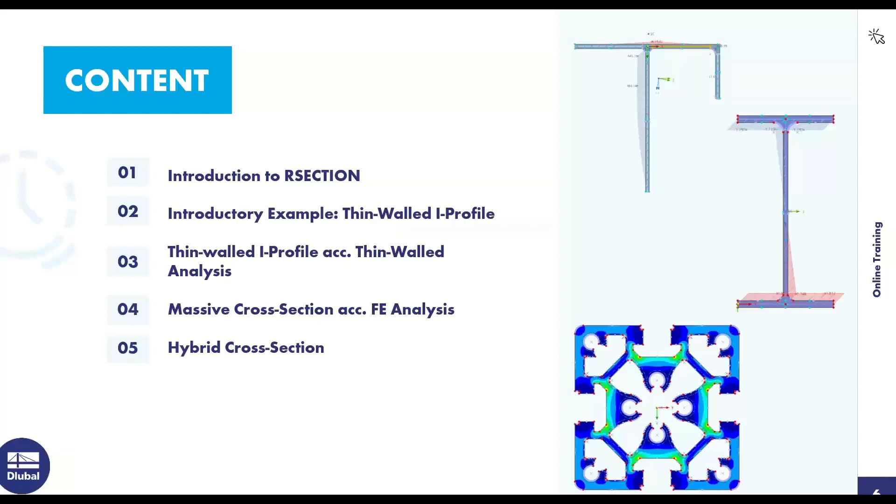Okay, then I will show you the RSECTION interface. RSECTION is an independently executable program for generating any thin-walled or massive cross-sections. If you want to design special cross-sections in RFEM or RSTAB that are not contained in the cross-section library, you can create them with RSECTION. You can then import these user-defined cross-sections into RFEM or RSTAB. In RSECTION, it's possible to calculate cross-section values and stresses.

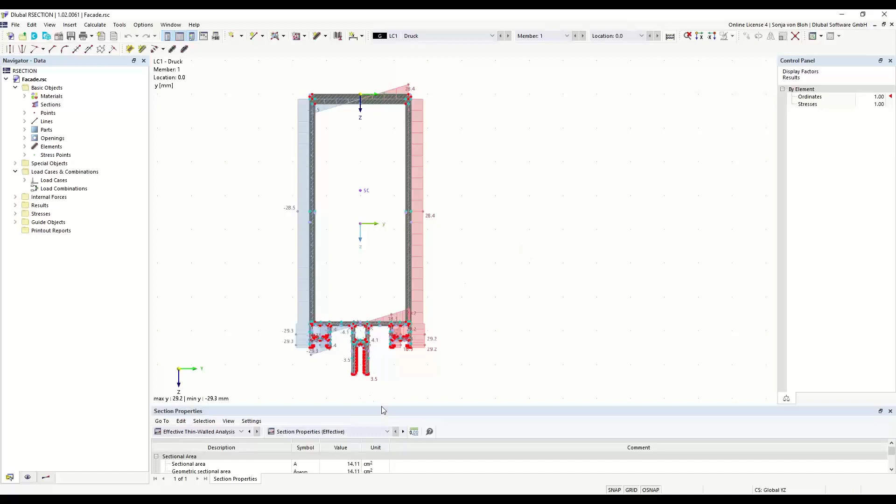The RSECTION user interface is the same as in RFEM 6 or RSTAB 9. The cross-section graphics and dialogues are displayed in the working window here. Most tasks can be performed with the mouse. In the table at the bottom, the keyboard is primarily used for numeric input, and you will also find the output of the calculated results.

Here on the left, you see 3 navigators: the navigator data, the navigator display, and the navigator for results. The data navigator manages the input data. If I double click here, opening this tree on an object, maybe here the points, it opens the corresponding dialog in which the selected object can be changed. However, it's also possible to create new objects. If you right click on an object, you will find here the corresponding functions.

Then I will go to the navigator display. The display navigator controls the graphical display in the working window. If the checkbox in front of an entry is unchecked, this object is hidden in the graphic. If I uncheck the points here, then you will see in the graphic that the points are not displayed anymore.

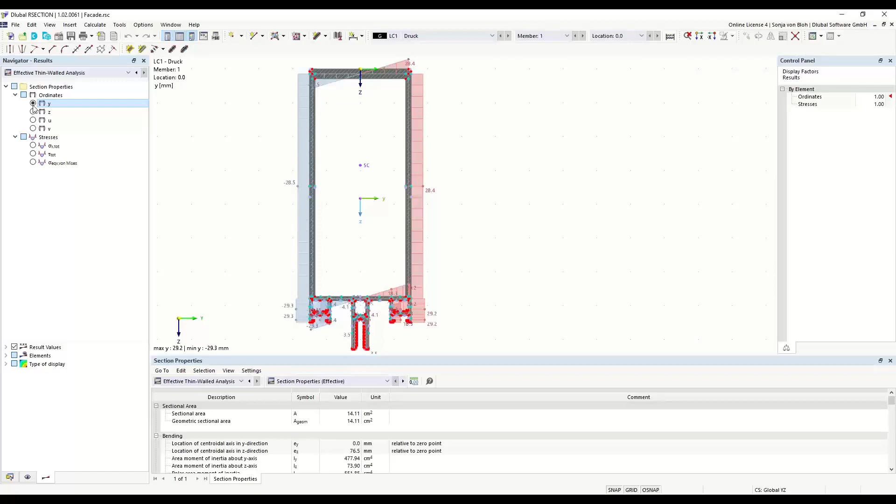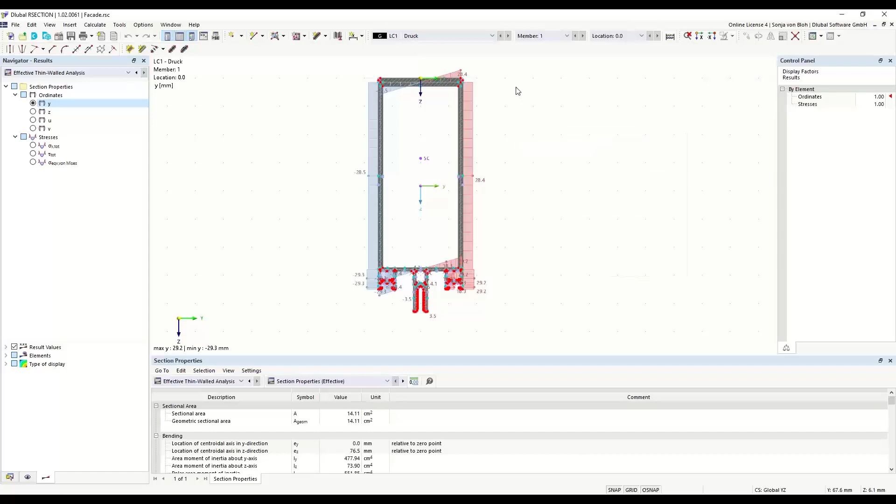Then I would like to go into the mouse functions. To move the section, you can hold down the mouse wheel and move the section accordingly. You can turn the mouse wheel to zoom in or zoom out. Then you can right click to open the context menu. You can also select objects with the mouse. If you open a window from left to right, everything that is completely within the selection area will be selected. Here, these objects were completely in the selection area, so they are now selected, which you can see with this yellow color.

If you drag a window from right to left, everything intersected by the selection area will be selected. You can see here now that also this part is selected because it was intersected by this window.

You can also select individual objects. Left click on the objects to be selected. Here I want to select this point, so I left click on it. If I want to add another object to the selection, I hold down the Control key, and then you can see the mouse pointer shows a plus, and I can select the other object.

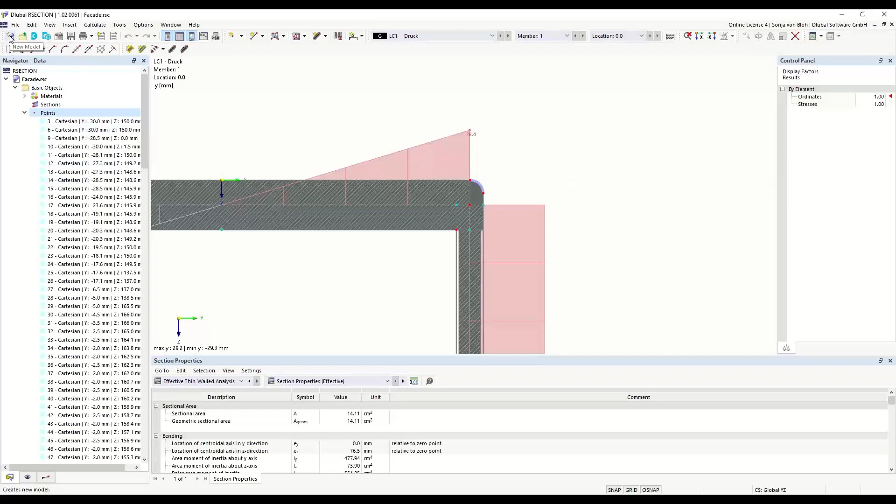To create a custom cross-section, I have to create a new file, and I will do this via this button, New Model. Then I first have to enter the cross-section name, and I name it Example 1.

Furthermore, the analysis method must be defined. I have two possibilities here: finite element analysis and thin-walled analysis. I choose the thin-walled analysis in this case. The effective cross-section can be calculated for both analysis methods.

After activating the option effective section, a standard must be selected. Several standards are implemented here: Eurocode 3 Part 1.1, Eurocode 3 Part 1.3 for cold formed sections, and Eurocode 9 for aluminum sections. I choose here this standard, Eurocode 3 Part 1.1.

According to this standard and the rules described in it, the subpanels are generated and the effective cross-section is calculated. The selection of the analysis method or the standard is irrelevant when using the RSECTION cross-section in RFEM or RSTAB.

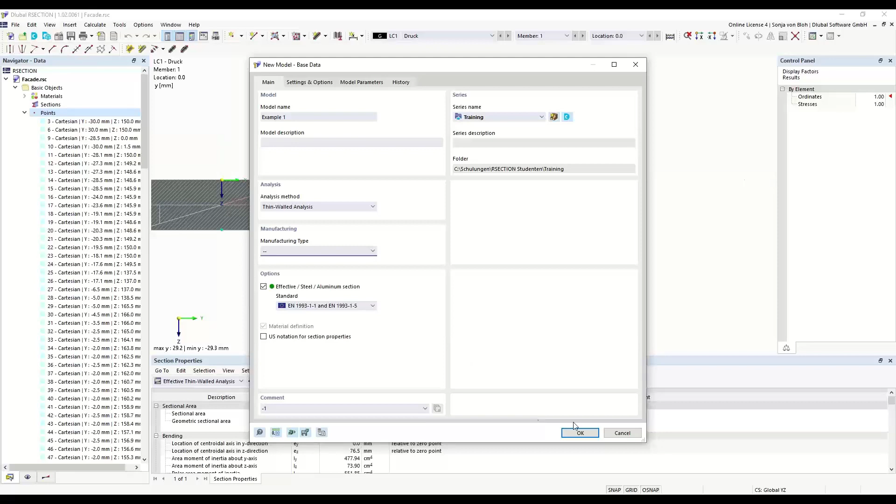I don't define a manufacturing type here in this case. Then I click OK, and a new file will be created.

First I define the material. Here already two materials are defined. If I double click on it, I will open the edit material dialog. If no materials are defined, it's also possible to right click on this material and create a new material.

I open this dialog again, and I can create on the list via the button Create New Material, a new material, or it's also possible to copy selected materials.

I can enter here, if I click on this button, a user defined name directly, and RSECTION, if I type in this name, lists all materials that match that name.

But it's also possible to open the material library via this button, and I will do this in this case. Here in the material library, filters are available on the left to quickly find the material. Here, maybe I can choose steel, then all steel materials are listed on the right.

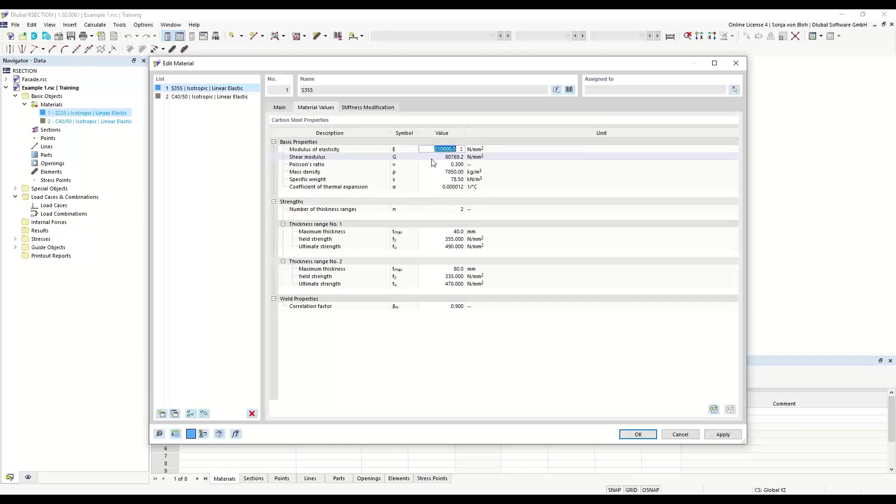If the material is not in the material library, I can create this material by activating the checkbox user-defined material, and then it's possible in the following tabs to define the properties I want to use. I don't do this today, so I deactivate this option again, and then I click OK.

I then create the elements. The definition of elements is required if the analysis method, analysis of thin-walled structures, is selected, or if the effective cross-section is to be calculated. An element must always lie in an area, and this area is called an RSECTION part.

Elements can be created graphically or via a dialog. The graphical input is called up via the symbols you can find here. The input via a dialog is called up via this navigator data. Here you can create a new element.

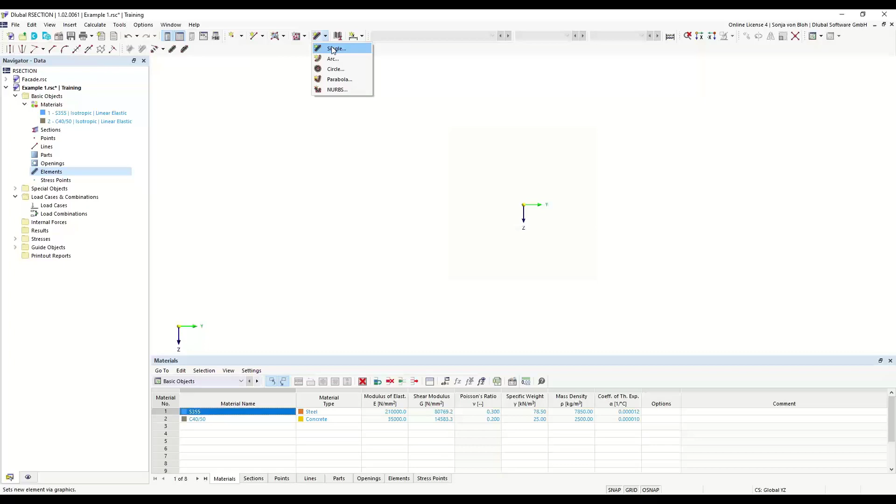When creating an element via the graphical input, the part is also created. When creating an element via the dialog box, the parts and the points of the element must be created beforehand. That's why I can't choose this dialog now, because I haven't created the points before. So I choose this function for the creation of elements. Here I choose single.

I enter the bottom flange here first, and for this I use the input mode length and direction. Here I define an angle of 0 degrees, a length of 150 millimeters, and a thickness of 10.7 millimeters. Then I can insert this element in the working area graphically, or it's also possible to define the point coordinates here. I put this on the coordinates 0, 0, and for this I left click here in the working area.

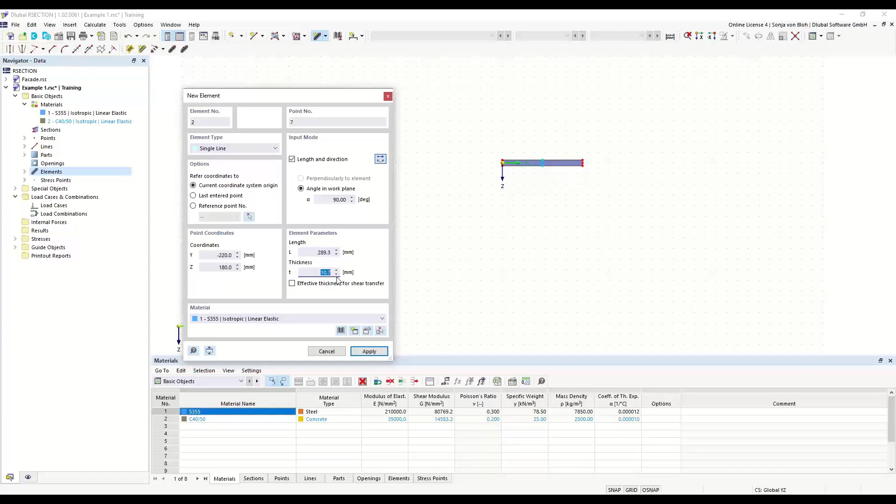Then I create the web, and for this I use the input mode length and direction again. Here I define an angle of 90 degrees, and you can see here what's happening. Now I reverse the orientation, and I define a length of 289.3 millimeters and a thickness of 7.1 millimeters. Then I left click here on this node.

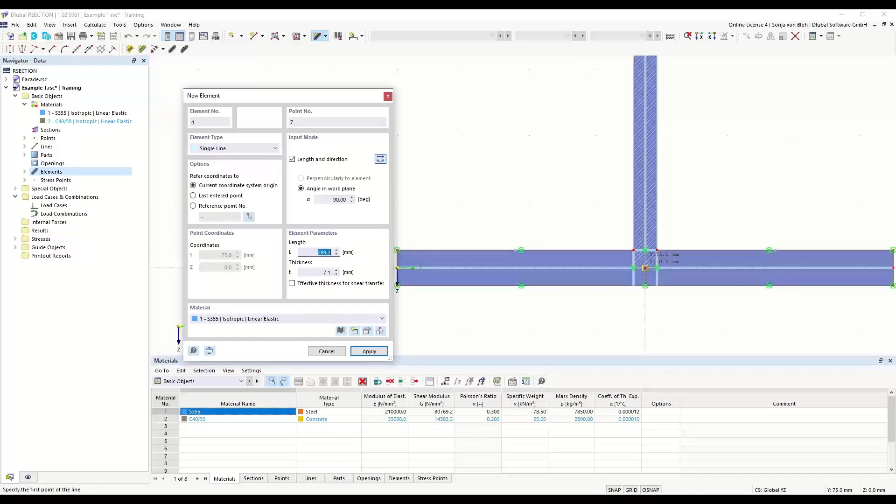Elements must be connected for the calculation of the effective cross-section. The connection is to be made via the start and end points of the elements. If two elements share the same points, they are connected. I have this element here, and they share this point, so they are connected.

Then I create the left flange. For this, I use the length and direction input mode again. Here I define an angle of 0 degrees and a length of 75 millimeters, and a thickness of 10.7 millimeters. Then I left click here on this point. Then I reverse the orientation again, and I left click on this point again.

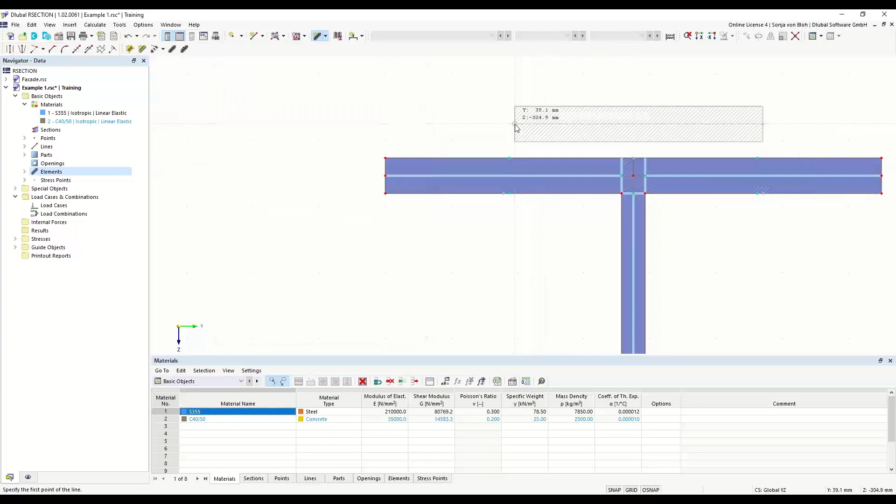The cross-section should be a rolled T cross-section to which a lower flange is welded. The round radius is 15 millimeters.

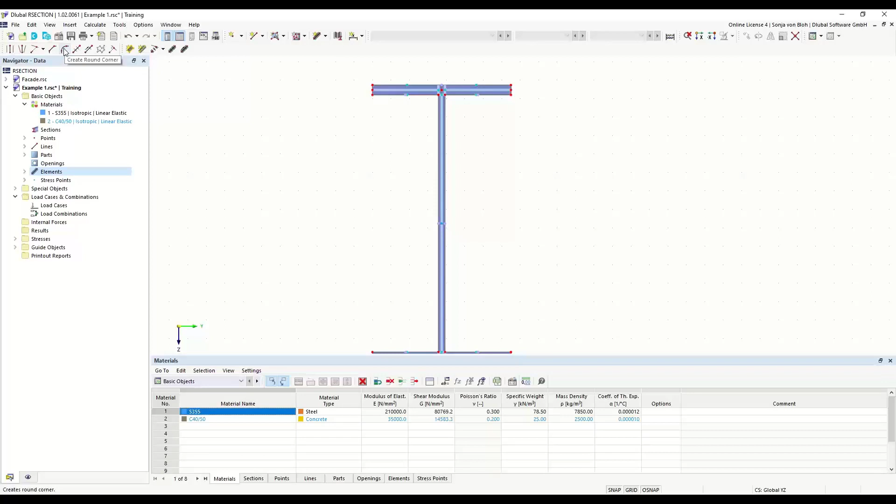I can define lines to create them, or use a function called create round corners. I find this function here, create round corners, click on it, and define a round radius of 15 millimeters. Then I have to left click on the corresponding lines. If I right click on the mouse, I leave the dialog, or close the dialog.

Then I have to define the welds. For this, I use the function create angled corner. Here you have two corner types, both edges and edge and angle. I choose here the edge and angle corner type.

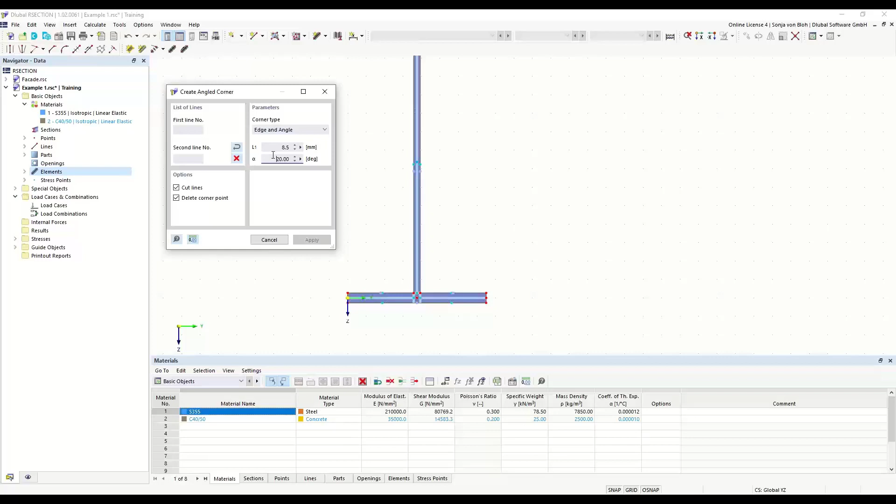The lower flange is welded with a 6 millimeter double fillet weld. I can type in the length here, or it's also possible to calculate it in this dialog. So I define 6 multiplied by the square root of 2. Then I have to define the angle, and the angle is 45 degrees. Then I have to click on the corresponding lines. And now my welds are created.

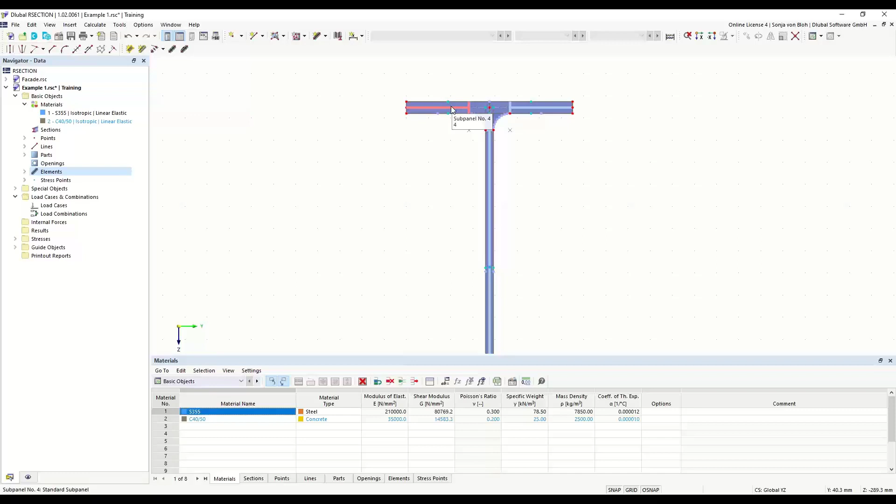What you can see here are the sub-panels, and these sub-panels are automatically generated based on the standard selected in the base data dialog, and these cannot be changed. If no elements are defined, the cross-section classification in RSECTION and the design in the design modules of RFEM or RSTAB is not possible.

It's also not possible to do a calculation of the effective cross-section if no elements and no subpanels are defined. In the design add-ons of RFEM or RSTAB, like steel design, the cross-section is then designed according to cross-section class 3.

I would also like to use this example to show you how to calculate stresses and the effective cross-section. In order to calculate stresses or the effective cross-section, a load case must first be created. Load combinations can also be created, and I create a load case now.

I do this via the navigator data. For this, I right-click on the load case, and then I choose a new load case. Then I can define a load case name if I want to, and I name it N. Then I create a second load case via this button here, create new load case, and I give the load case the name M.

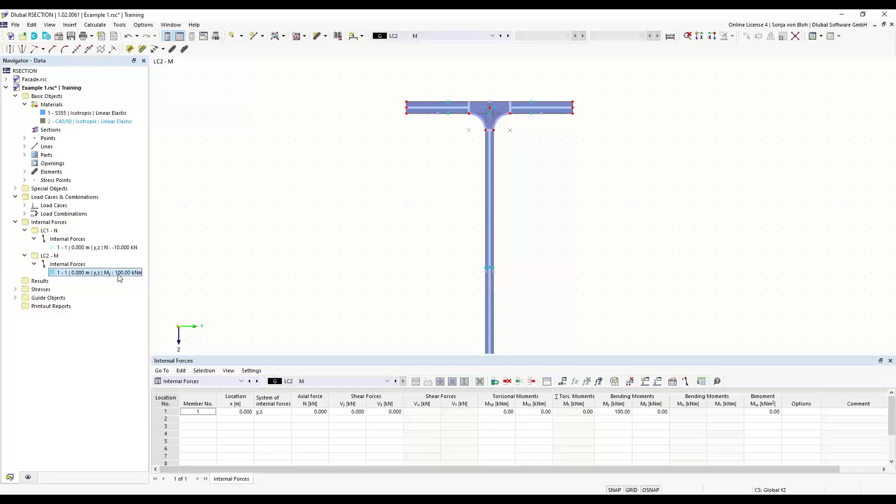Here I click on Apply and Next, and choose load case number 2. Here I want to define not an axial force, so I set it to 0, and I want to define a bending moment about the y-axis, here 100 kilonewton meter. Then I click OK. In the navigator data, you can now see in load case 1 an axial force of minus 10 kilonewton is defined, and in load case number 2, a bending moment of 100 kilonewton meter is defined.

The blue dots that you can see here on the graphic are the stress points. Stresses are calculated and displayed at the stress points, and the stress points are generated automatically. Stress points can also be defined manually, and I want to do that here.

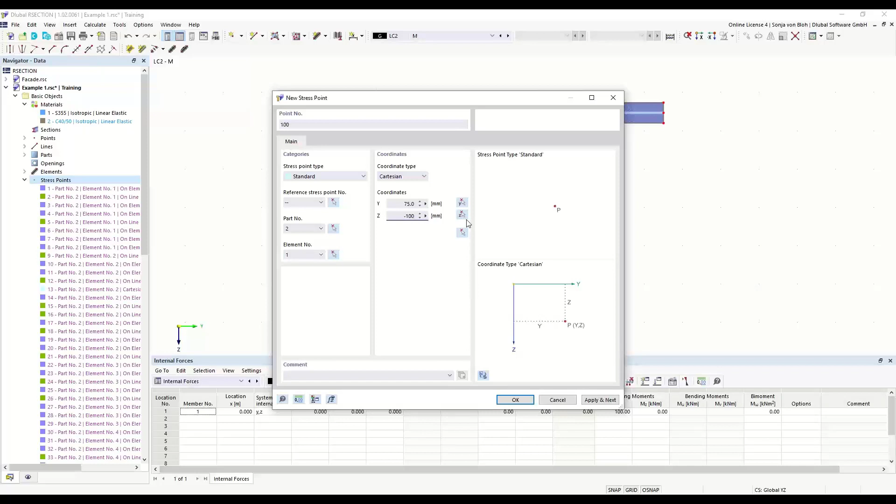So I go to the navigator data again, then to Stress Points. I right click on Stress Points and choose New Stress Point. Then I can define the point number if I want to — I define 100 — and then I have to define the coordinates: Y I define 75 millimeter and Z minus 100 millimeter. Then I click OK, and the stress point will be generated.

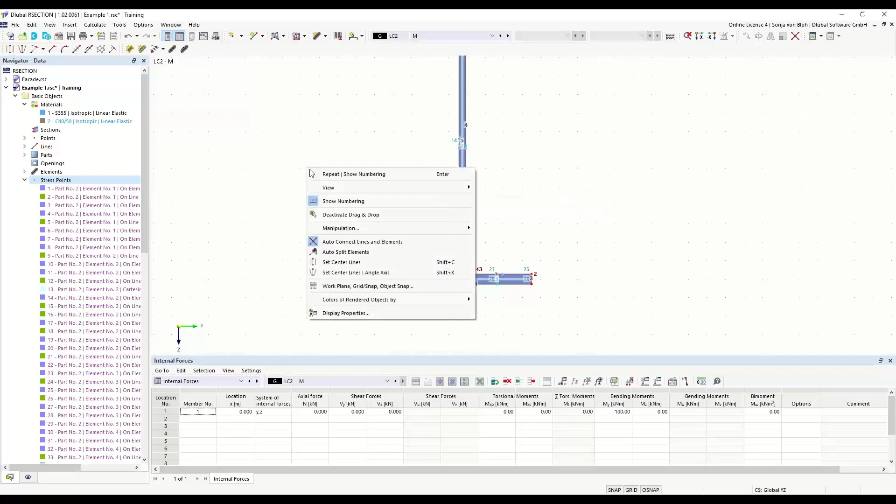You can see it if you go with your mouse upon the stress point. It's also possible to show the numbering. You can right click here and choose Show Numbering. Then you can see, okay, this is stress point 100. I deactivate this numbering again.

It's also possible to show the numbering via the navigator display. Here you have this checkbox numbering, and here you can select or deselect the display of points, lines, and so on if you want to.

Which stresses are to be calculated and output in tabular and graphical form can be set in the stress configuration. I will show you this now. I go to the navigator data again, then to Stresses, Stress Configuration, and double click on the stress configuration. The corresponding checkboxes are to be activated or deactivated here. If I click on this entry, you get information on how the stress is calculated. Then I click OK.

I start the calculation now. In the result navigator here, you can switch between the results of the gross cross-section — that's here the thin-walled analysis. I can show you here the stresses maybe, and this is for load case number 2. You can switch here also.

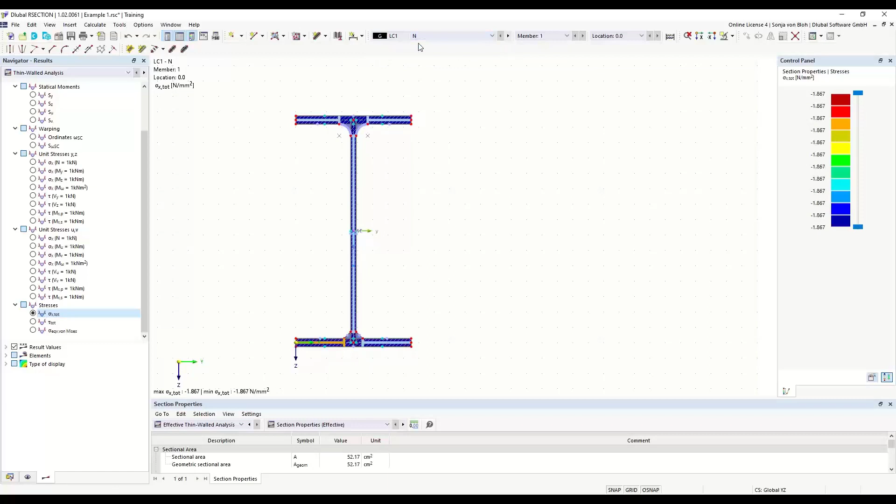You can see here the stresses from load case number 1 or from the load combination. I choose load case 1 — there was an axial force defined. And it's also possible to change the type of display. Here I choose off.

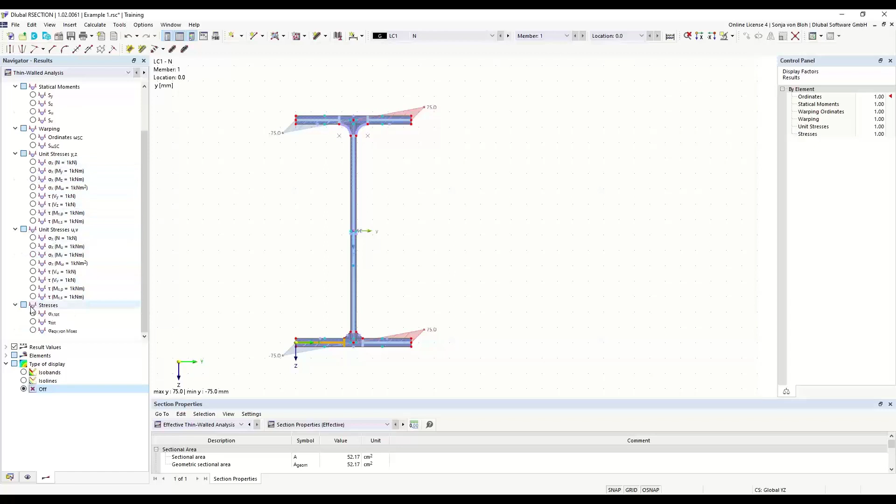It's also possible here to show the different section properties. You can show here the statical moments, or the ordinates, or unit stresses, or the stresses. Then it's also possible to show the effective thin-walled, the effective cross-section. And you can see here in the graphic in the working window that this cross-section falls into class 4.

Here, this cross-section is reduced. According to the standard, the reduction in strength due to local buckling can be taken into account through effective width, and this is implemented in RSECTION.

It's also possible to display or to control the section properties in numerical form.

For this, you also have the possibility to show the section properties of the gross cross section. You have to choose thin wall analysis, and then you have the possibility to show the section properties via this dropdown. Here you can see the sectional area calculated for the cross section, and the area moment of inertia about the y-axis and z-axis, and so on. It's also possible to show the statical moments and warping in numerical form, and also the stresses.

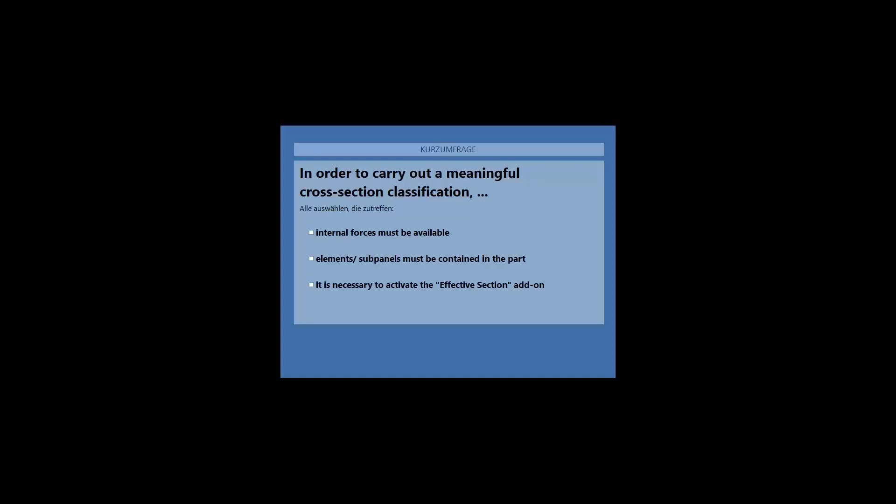Okay, I will now show you the results. For a classification, internal forces must be defined, elements must be defined, and it's necessary to activate the effective section add-on.

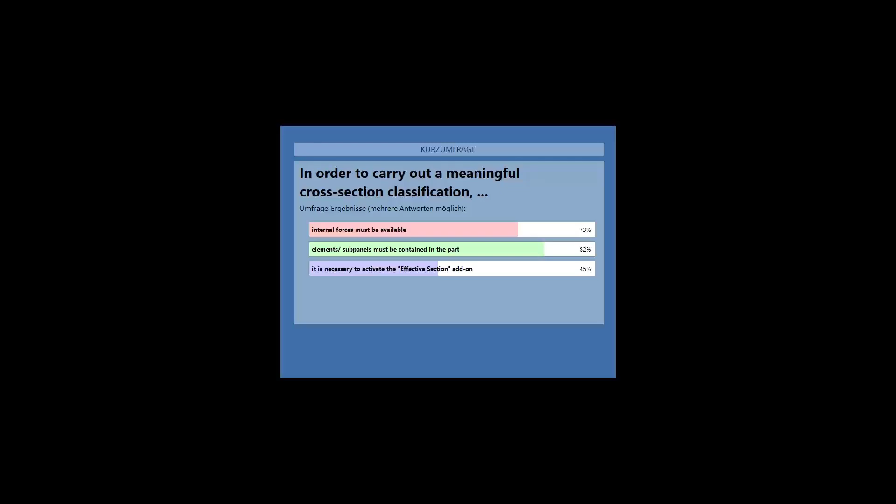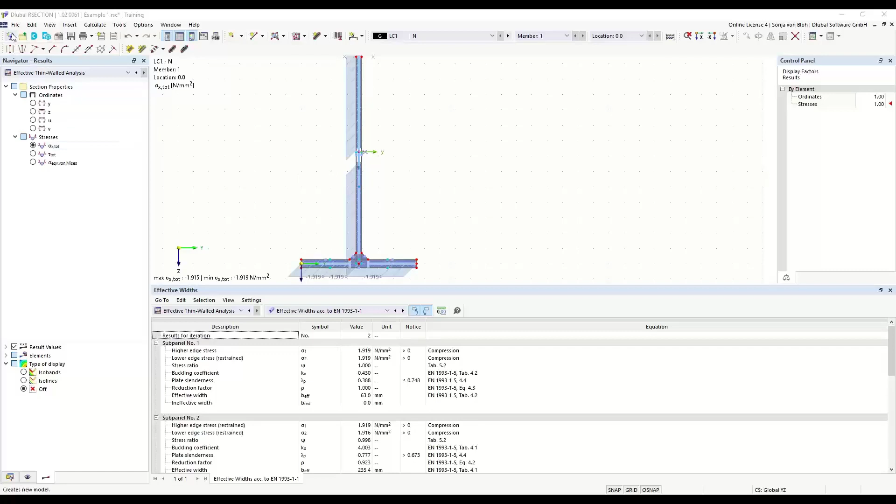I would now like to use another example to show you how you can access cross-sections from the library and modify them. For this, I create a new file. I click on New File and name it Example 2. I choose the analysis method, thin wall analysis, and I also choose the option effective section and the standard EC3 part 1.1. I click on OK.

I define the material first. For this, I modify this material. This is the material that I wanted to use, but I show you the material library again. I can click on this button, import from material library, and then search for the material I want to use. It's an S235. I choose this material, click on OK, and OK.

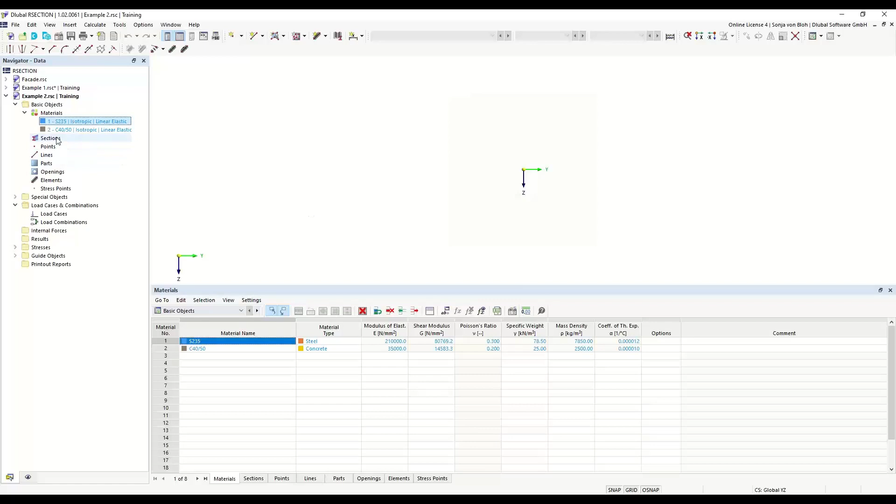Then I insert a cross-section from the cross-section library. To do this, I right-click here in Navigator on the tree section and choose New Section. The window is structured like the material window. A cross-section can be created here via this button, Create New Cross-Section. It's also possible to copy a selected section, and also possible to type in the name of the cross-section.

Maybe here IPE 200. Then all cross-sections that match with the name are listed in this list. It's also possible to open the cross-section library via this button, Import Section from Library. Then I have to select the section from the library. Here I choose the L section.

Here again, the cross-section library is structured in the same way as the material library. You have filters on the left, where you can filter by manufacturer, for example. It's also possible to search for a cross-section.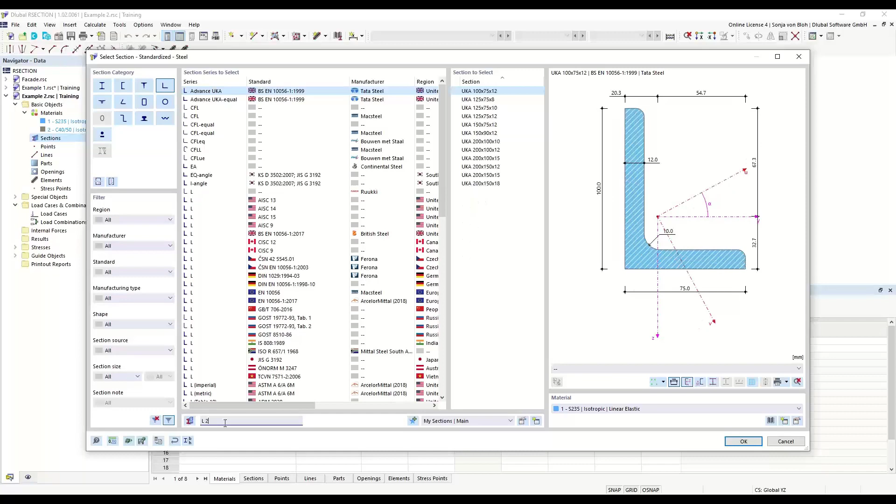Here I type in L 200, 150, 200 - the 0 was missing - 150, and 12. Here I choose this standard, and then this section, and I click on OK.

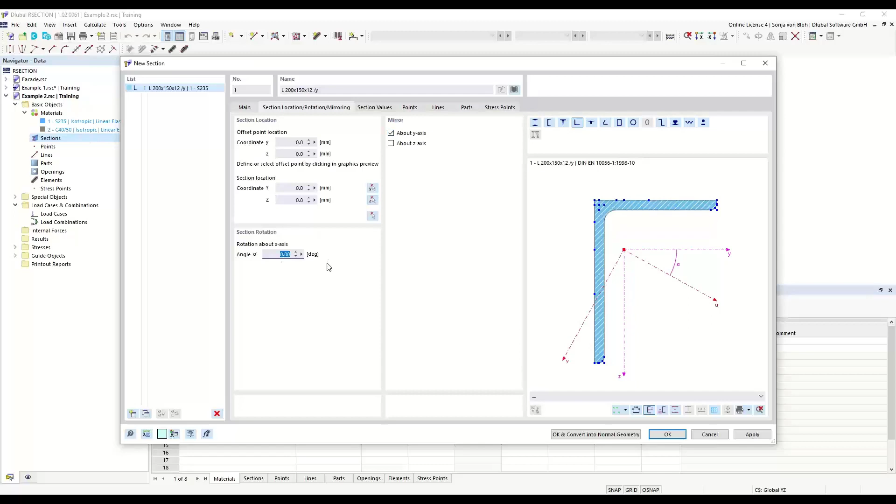The angle should be mirrored around the y-axis, so I activate the checkbox about y-axis, and the section should be rotated by 90 degrees, so I type in 90 degree.

Furthermore, I select the offset point in the graphic - this point. At this point, the cross-section is placed at the insertion point, and I can define the insertion point manually in these boxes, or it's also possible to pick this in the working window. I will do this - I pick the 0, 0, and then click on OK.

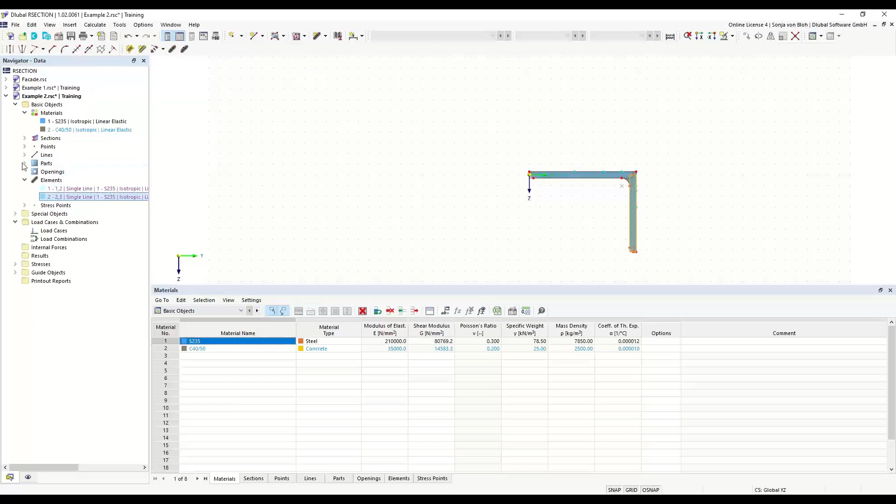When inserting this thin-walled cross-section, two elements were defined, and also the part. The cross-section can be subsequently edited. If I double-click on this cross-section, I open the Edit Section window, and here I can change the section location or the mirroring, and I can also change the cross-section.

I can import another cross-section from the library. It's also possible to move or mirror this cross-section via these functions: move, copy, or mirror. However, in order to modify individual objects such as points or lines, the cross-section must be split.

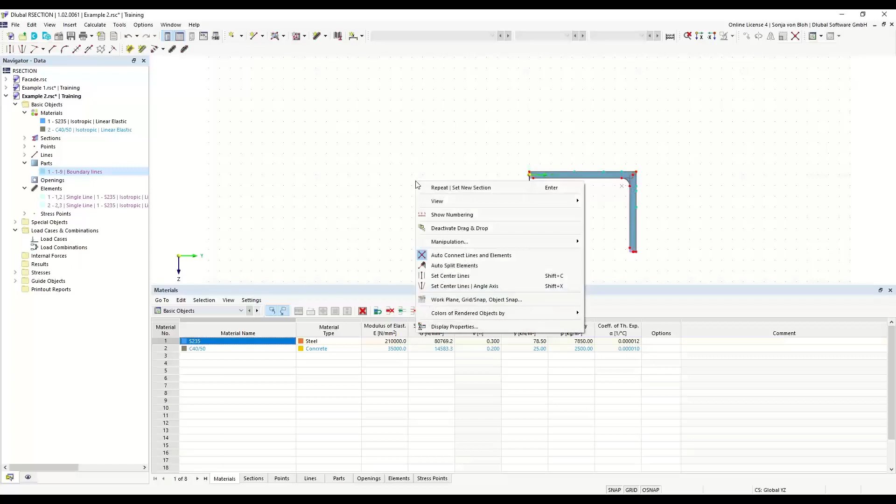The cross-section is to be supplemented by further cross-section parts. I therefore split the cross-section into its individual parts for further processing. For doing this, I first deactivate this function, auto-split element. Then I right-click on the section and choose the function convert into normal geometry.

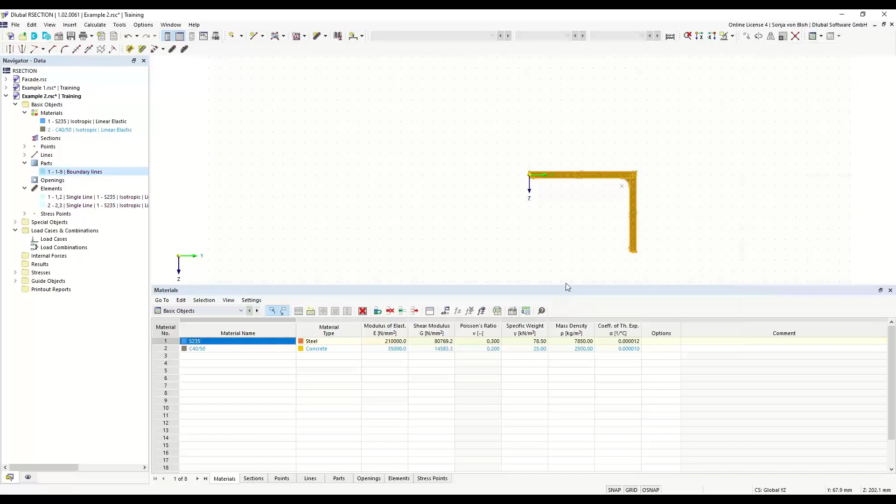Now this cross-section is split into its objects, and the fillet isn't needed, so I delete this point. With deleting this point, the fillet is also deleted. Now you can see that the elements are colored in red, and this red color says, okay, there's something wrong.

Here the part is missing. You can see the part was also deleted, and elements must lie in a part. So now these elements are shown in red.

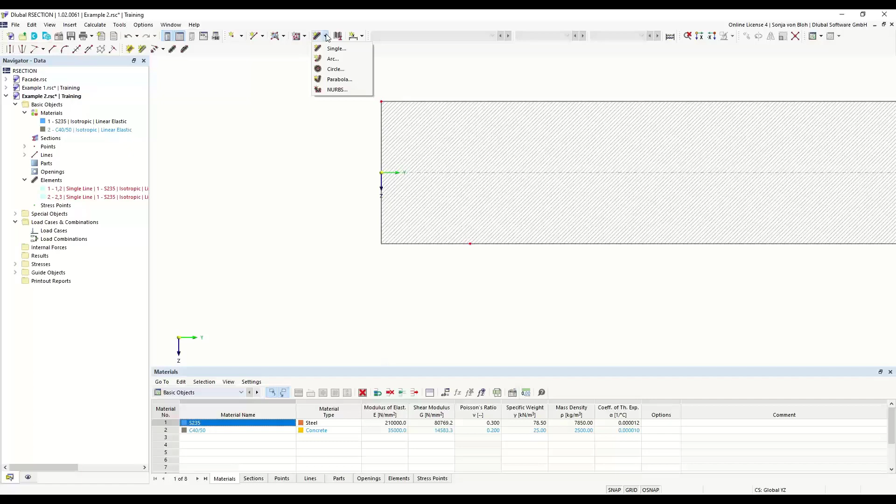I add more elements via the graphical input. I choose single, and use the input mode length and direction again. I define an angle of 0 degree, a length of 200 millimeter, and a thickness of 12 millimeter. I want to place this here, so I have to reverse the orientation, then left click here in this working window.

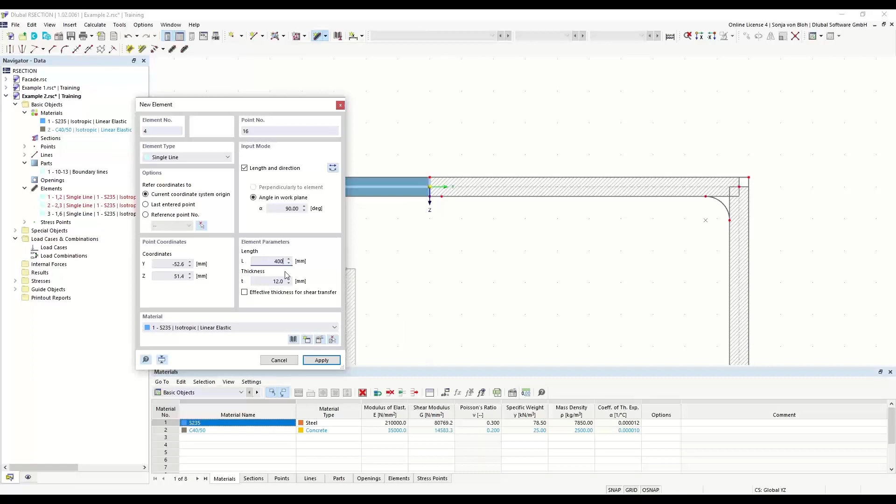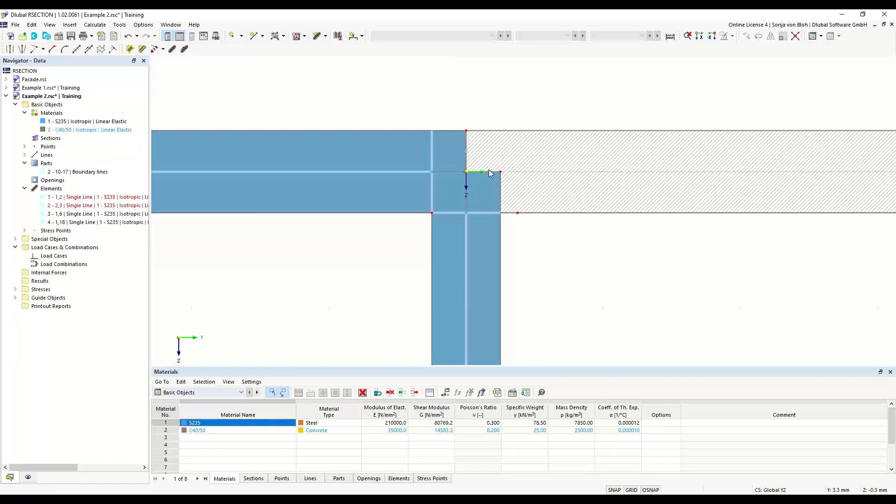Then I add another element with an angle in the work plane of 90 degree. I have to reverse the orientation again, so I click on this button. I define a length of 400 millimeter and a thickness of 12 millimeter, then left click on this point. Then I right click so that this window is closed, and I don't need these lines here, so I delete them. I press the delete button.

I do this for this line also. Press on delete.

Welding seams should also be taken into account in the cross-section properties, and I create the weld seams using the angle corner function that I've shown you before in another example. I click on create angled corner, and use the corner type edge and angle again. Here a 6 millimeter double fillet weld is to be defined, so I define 6 multiplied by square root of 2, and an angle of 45 degree, then click on the corresponding lines.

Furthermore, I still have to create the part by selecting the relevant lines, and for this I use the function select boundary. Here I have to define the material for the part, then click OK, and then click on the line, and the part is created. What you can see now is that the red color for the elements is gone, because now the part necessary for the elements is created.

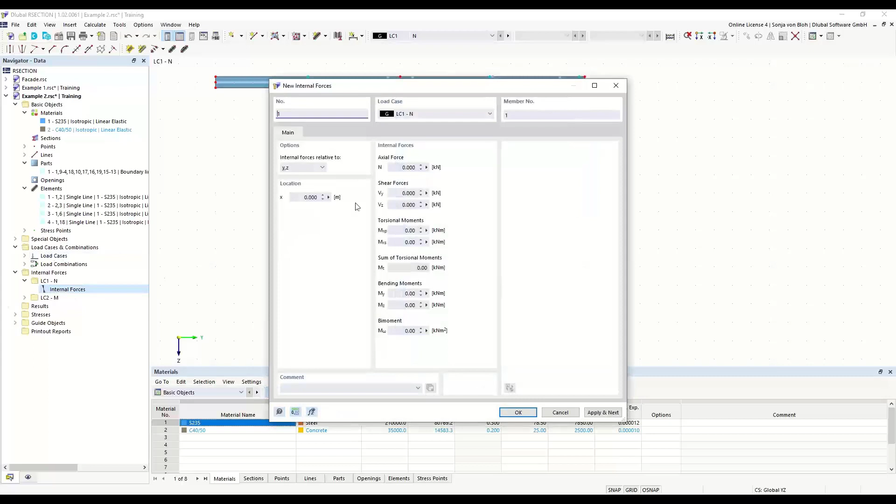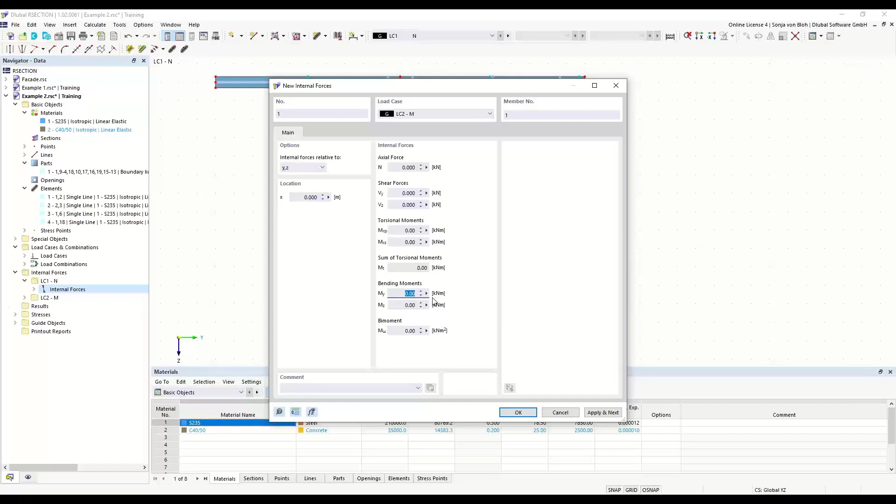Then I have to define the internal forces. I double click on internal forces and define an axial force of minus 50 kilonewton for load case N. Apply and next. Then I change to load case 2, and define an axial force of 0 kilonewton and a bending moment of 20 kilonewton meter. Click OK, and I start the calculation now.

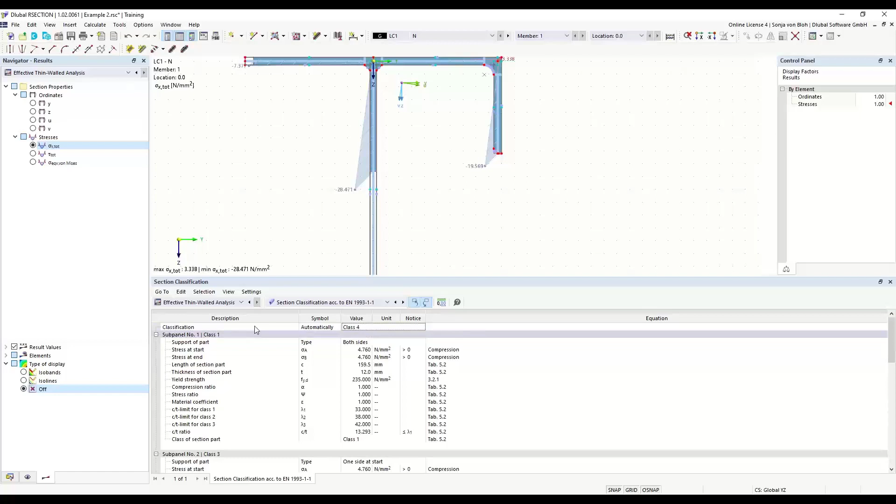I can see here the effective cross-section. I change the type of display to off, and I want to see the stresses. I see here the reduction due to the class 4 cross-section. I can control this in numerical form, section classification. It's class 4, and I can also see the calculated reduction.

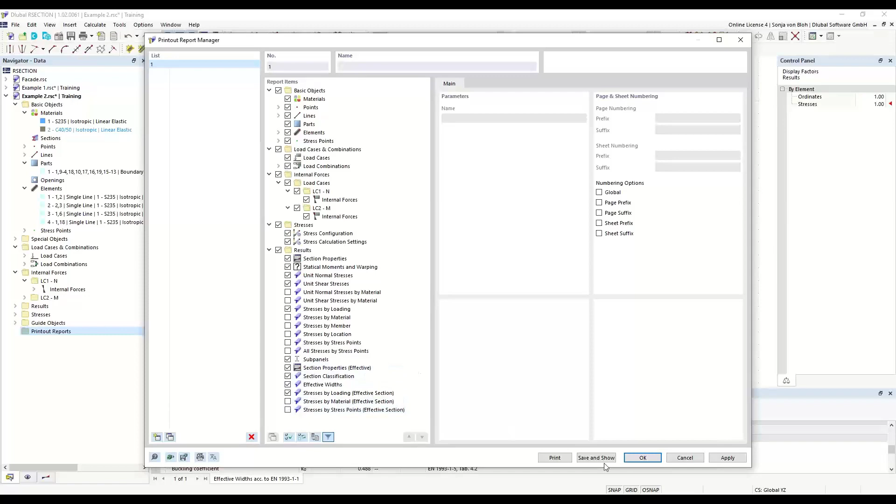I want to create a printout for the documentation, so I go to Navigator Data again. Then I right-click on the printout report and choose New Printout Report, and I can choose the report items. I don't want to have the stresses by material, by member, location, stress points, or stresses by stress points here. And I don't want to see the stresses by loading and material here. Then I click on Save and Show, and the printout will be generated.

You can see it here. It's also possible to add a graphic to this printout. For this, I go to the button print graphics to the printout, and maybe change a little bit the representation. Maybe I can add all values, and I want to tilt the result diagram into the work plane.

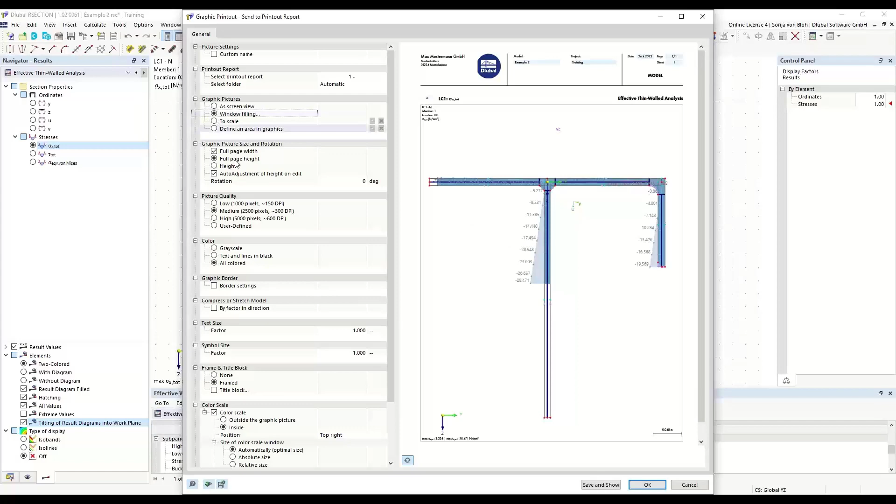Then I choose print graphics to the printout report again. Here it's also possible to influence the size of the picture. I can choose window filling, then it's much bigger. Then I click on Save and Show, and this graphic will be added to the printout.

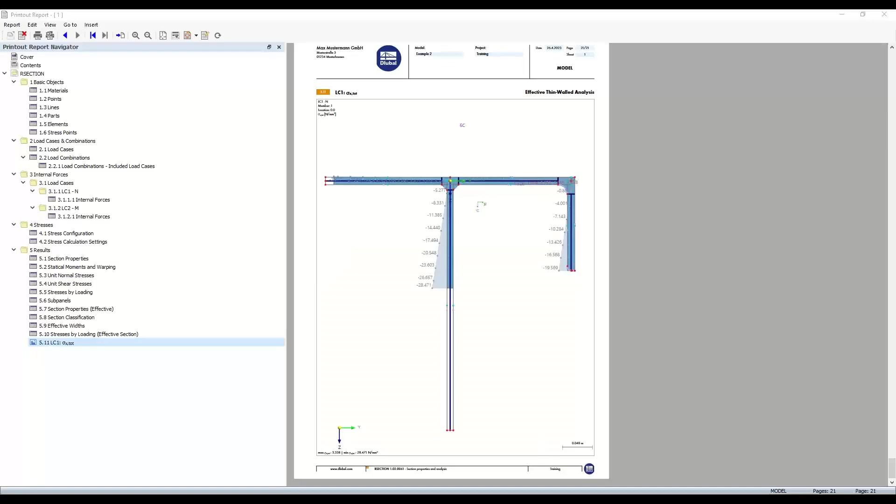In my first example, I show my screen again, and I close the printout report, and go to my first example again. I forgot to show you how to display the stresses on certain stress points.

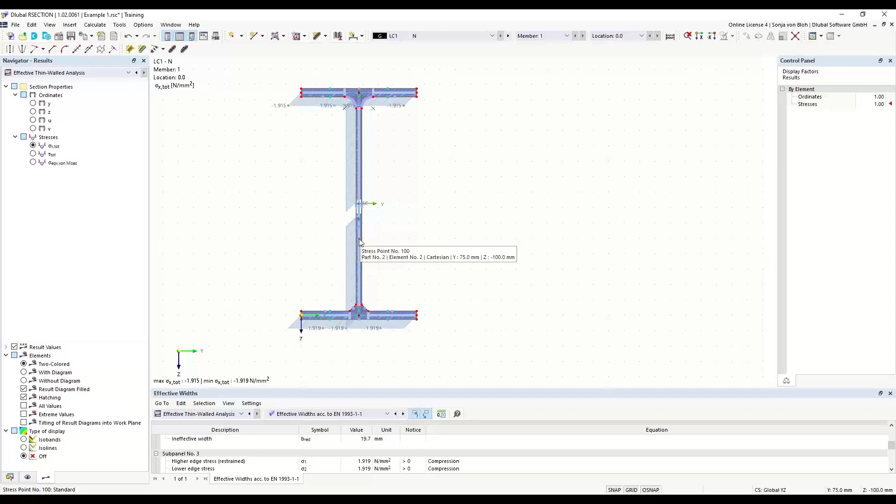For this, you remember maybe we have created stress point number 100. If you want to see the stresses on stress point number 100 in the table, you have to choose the table stresses, then click onto this stress point, and now you see here the stresses on this stress point. I forgot to show you this.

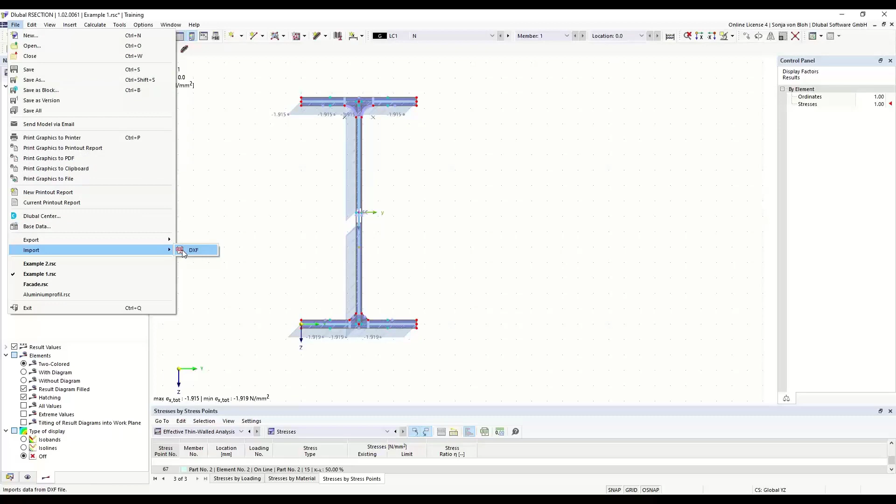In the next example, I would like to show you that you can also create cross-sections by importing a DXF file. A DXF file can be imported via menu File, Import DXF. Then you have to choose the corresponding DXF file and click on Open.

Here in this window, I can specify the insert point and the rotation. It's also possible to switch the coordinates.

In this section, Create RSECTION Model, you have 3 options for creating the cross-section. The option to create all elements automatically is useful if the outlines of the cross-sections are available in the DXF file. RSECTION attempts to create center lines for parallel lines and then sets the elements between the intersections. Only elements that do not exceed the maximum thickness defined in the maximum thickness field are created.

The import function, use DXF template lines as center lines, is useful if the cross-section geometry is available as a centerline model. You can then import this cross-section, and elements are created on the center lines with a thickness that you can define here.

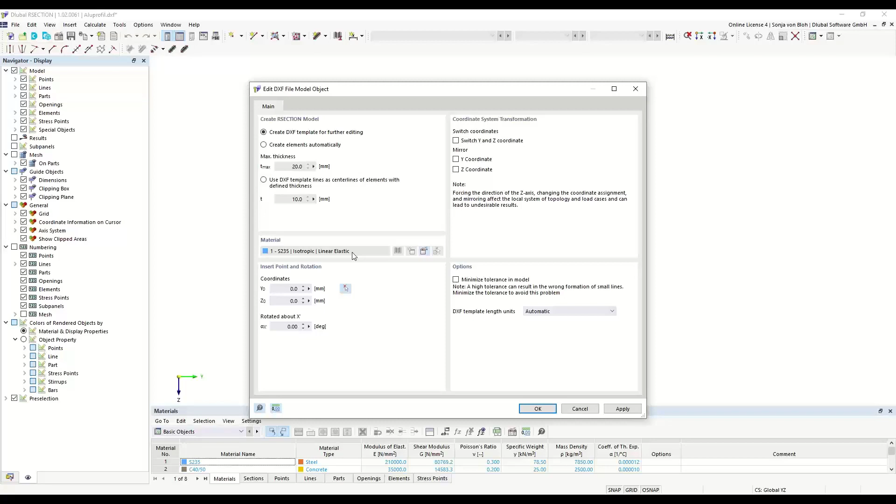The function create DXF template is useful for massive cross-sections where no elements need to be created. This function can also be used for complex cross-sections where I only want to create elements for the decisive cross-section parts. With this import function, the lines in the DXF file are imported as lines.

I use this function here now, so I click on OK. And now the cross-section is imported.

First I define the material for this cross-section. So I go to the navigator data again, click on materials, double click on this material, and I want to choose an aluminum material from the material library.

So I open the material library again, and then I can choose aluminum, and here I search for EN AW-6060, and then I choose this material and click on OK.

Then I open the base data, and here I have to choose the analysis method, and a finite element analysis is to be carried out for this cross-section. So I choose here the finite element analysis.

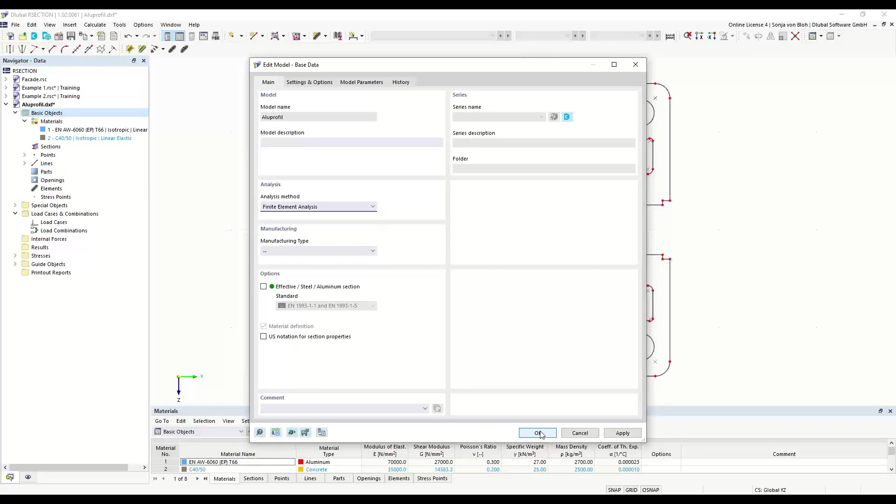Finite element analysis should be performed on massive cross-sections such as timber or concrete cross-sections, in contrast to thin-walled cross-sections, where the stresses can be regarded as constant across the cross-section thickness. The stress distribution in massive cross-sections is variable, and this can only be determined with a finite element analysis. So I choose this analysis method, then click here on OK.

In a finite element analysis, only a part needs to be defined. It's not necessary to define elements. So I define now this part, and for this I use the function select boundary.

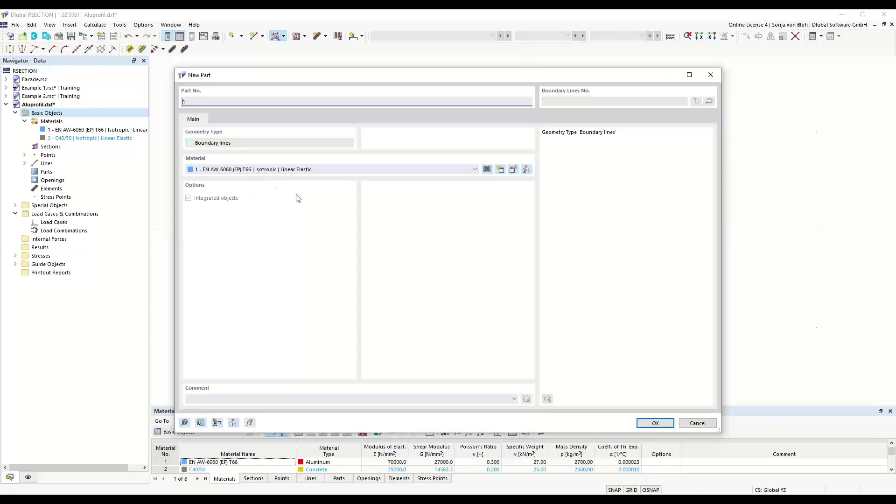Then I choose the material EN AW-6060, click on OK. Then I choose the line, and the part will be created.

After creating the part, I still need to create the openings. I use also here the function select boundary for openings, and then I choose the corresponding lines.

I want to show you that you can also create openings with the function rotating. So I now select the opening that I want to rotate and copy, and then I select the function rotate selected objects.

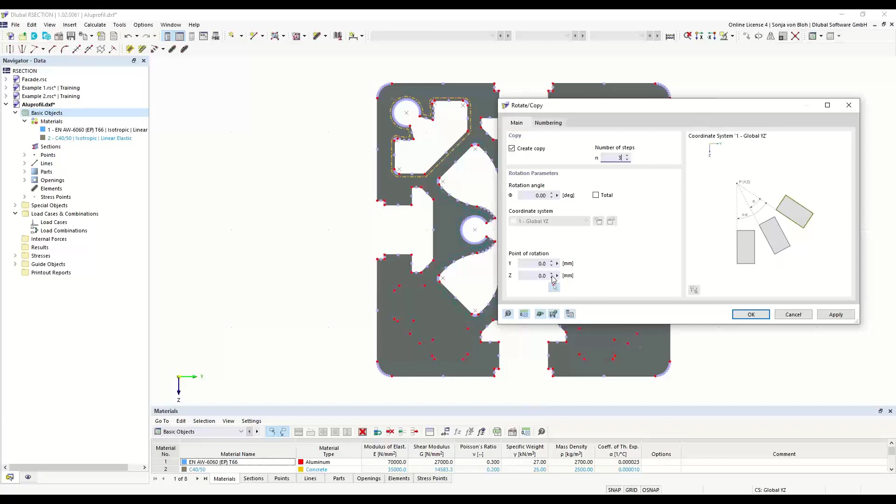Because I want to create this opening, I activate the checkbox create copy. I want to have 3 copies, and then I have to define the point of rotation. I can pick it in the work window, and then I click on OK.

Oops, sorry, I forgot to define the rotation angle. This should be 90 degrees. And then I click on OK.

And now the openings are created.

I want to calculate the stresses here as well. So I create a load case, new load case, and I name it N plus MT. Then I click here on OK.

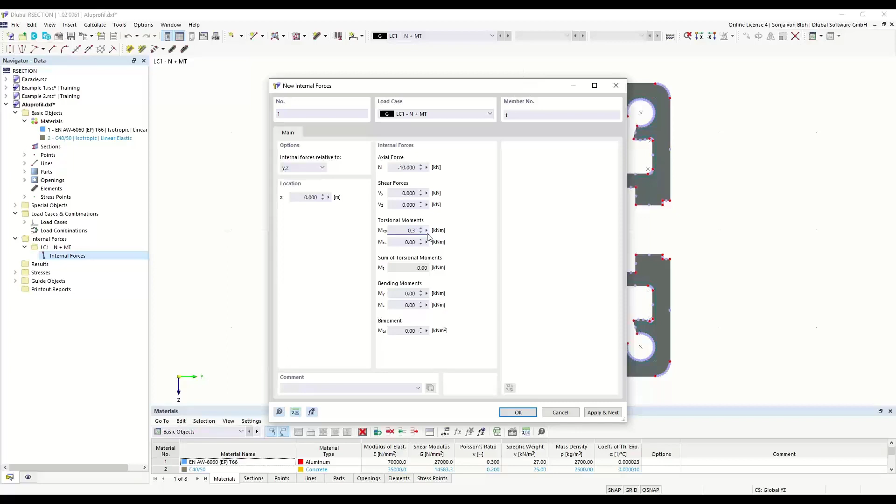Then I have to define the internal forces. Here I define a compressive force of minus 10 kilonewton, and here I define a torsional moment of 0.3 kilonewton meter. And I click here on OK.

And then I start the calculation.

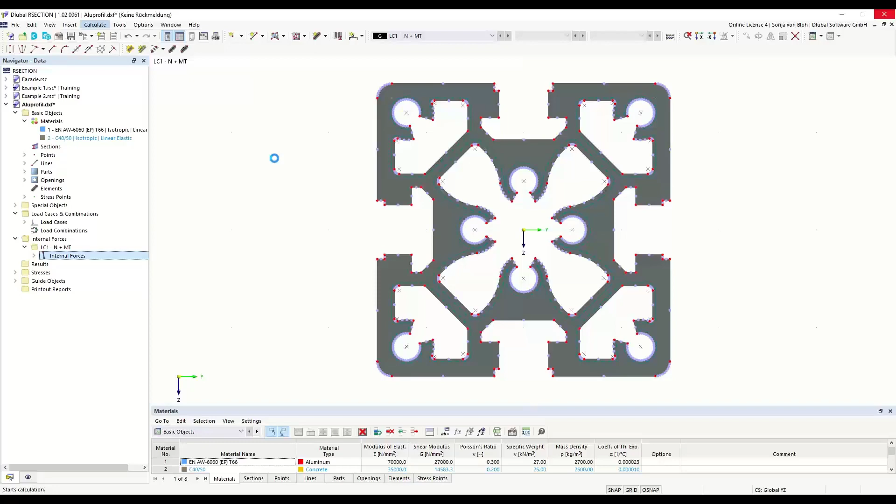And here in the navigator results, I have only the results of the finite element analysis. Here I choose the stresses, the equivalent stresses here. And you can see now the graphical results on the working window.

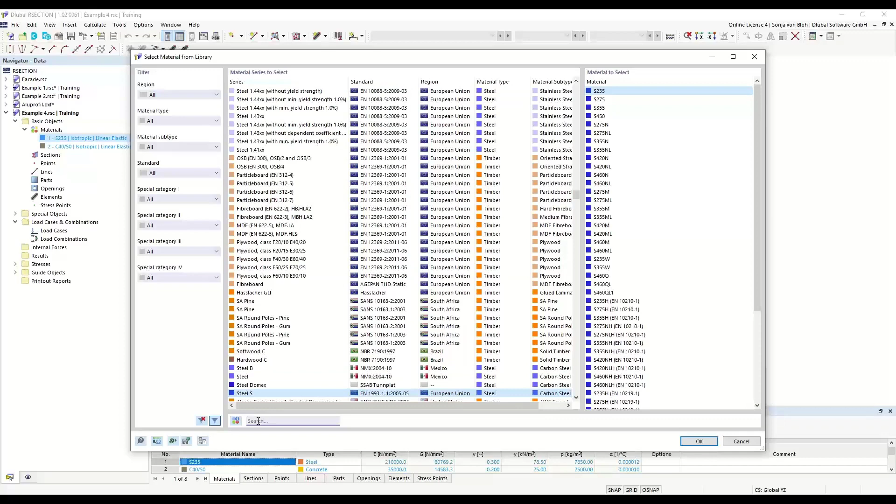Then I have to define the materials. I modify the first material, open the material library again, and choose a steel material, S235. So I choose this material.

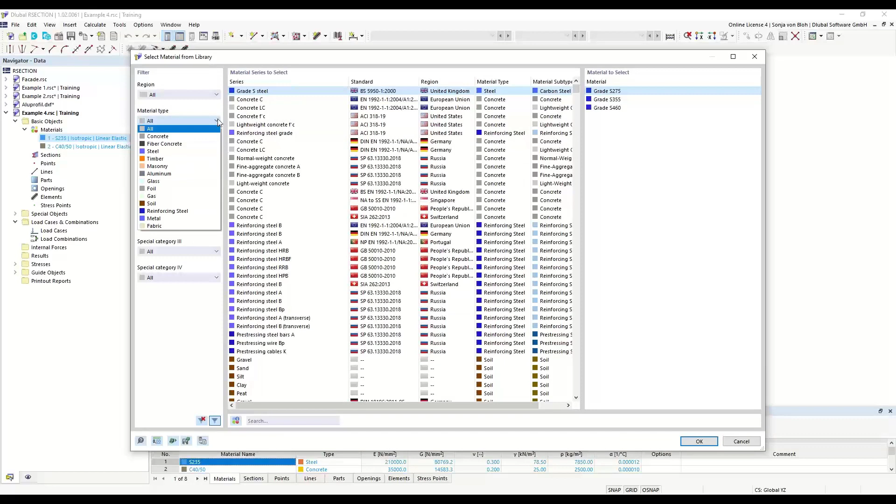For the second material, if you don't have one, you can create it via this button, Create New Material. Then go to the material library and choose concrete for material type. I choose C40/50, click OK, and OK.

A 1000 millimeter wide and 200 millimeter high concrete cross-section lying on an HEB steel cross-section is to be modeled. So I model the concrete cross-section.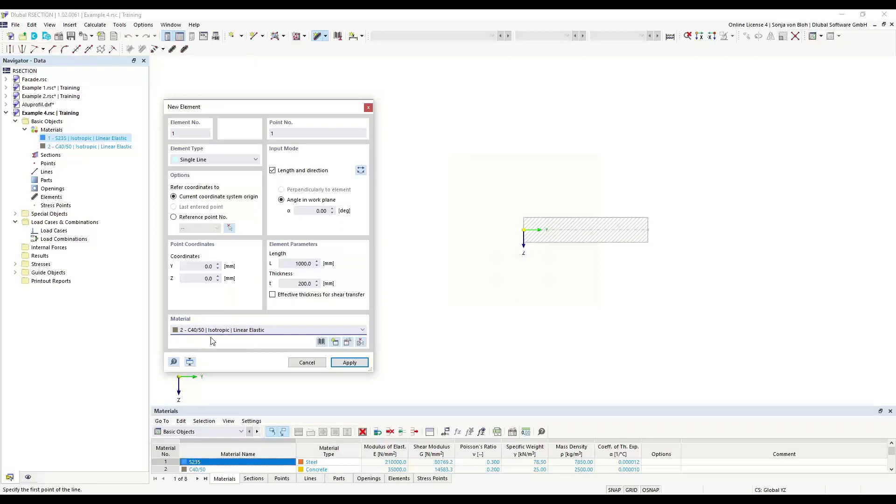For this, I use this function single element, with input mode length and direction. I define a length of 1000 millimeters and thickness of 200 millimeters, choose material 2, the concrete material, and add this in the working window with right click.

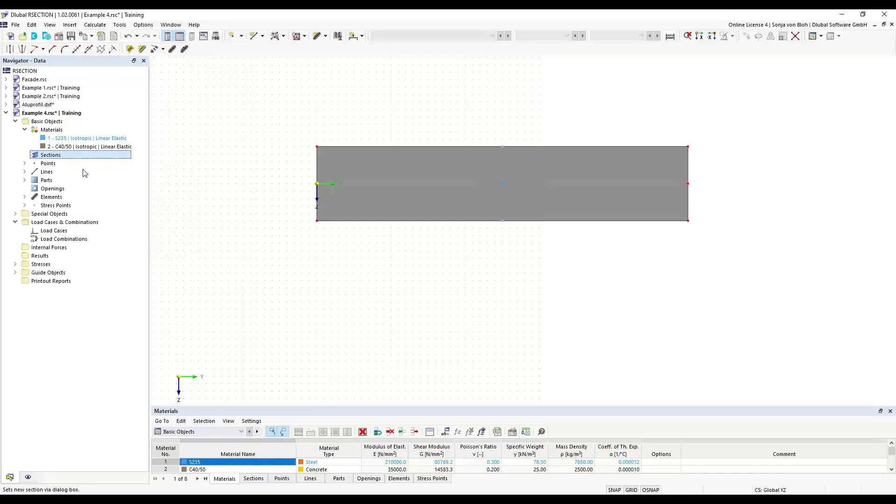I close the window and select HEB 400 from the cross-section library. To do this, I right-click on Section, New Section, open the section library, choose I-beams, H-beams, type in HEB, select this cross-section, and choose the material, the steel material number 1, S235. Click on OK.

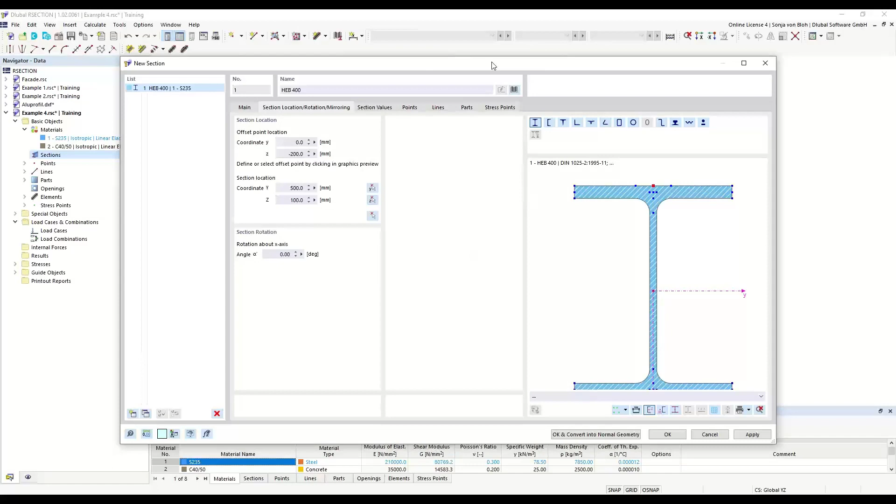Then I pick this point, and pick this location, and click on OK.

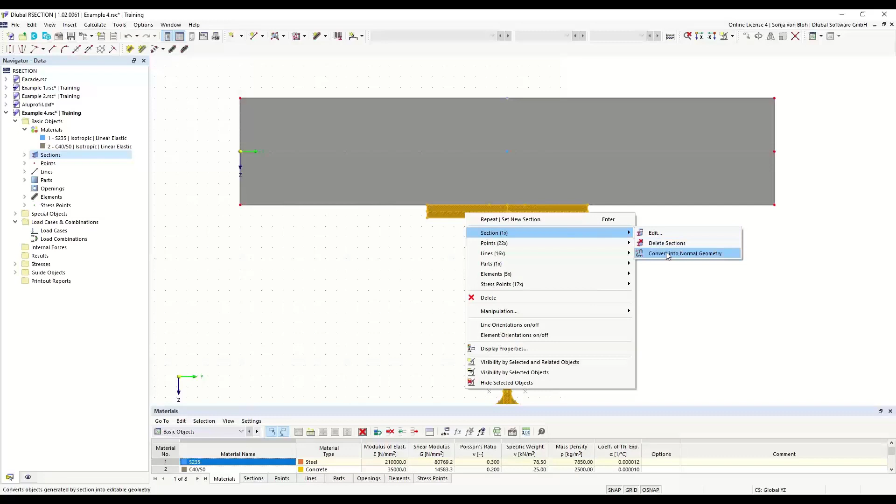Now I have 2 lines here. This is not so good for the calculation. That's why I right-click on the section and convert it into normal geometry. I still have 2 lines, but it's possible with this function, connect lines and elements. I go by these lines, right-click, and then you will see we have only 1 line.

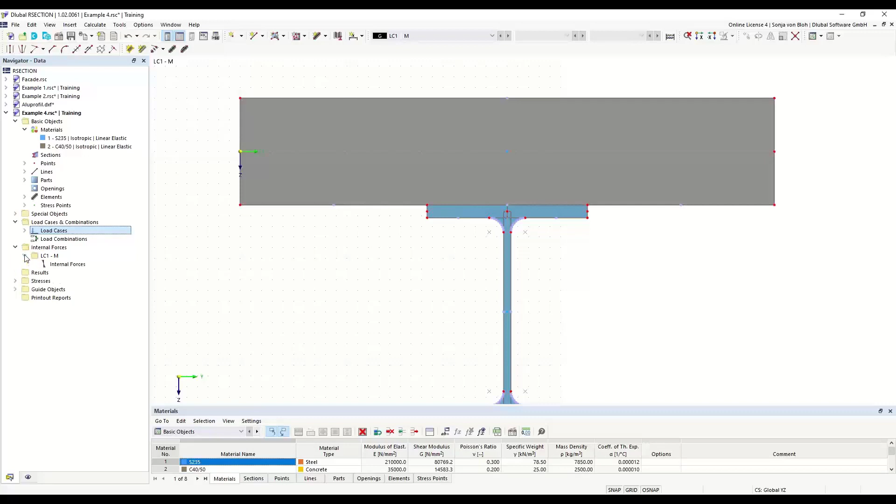Then I create a load case for the bending moment. New load case, I name it M. Click OK, and I define an internal force of 100 kilonewton meter. Click OK, and then I can calculate this cross-section.

In the section properties, you can see that the ideal section properties will be calculated. The reference material is always the first material that I've defined, in this case S235. And you can also see the geometric sectional area.

I would also like to show you how to import the cross-section into RFEM. To do this, I save this cross-section, and now I open RFEM. To import the cross-section, I go to the navigator data again and right-click on the section, new section.

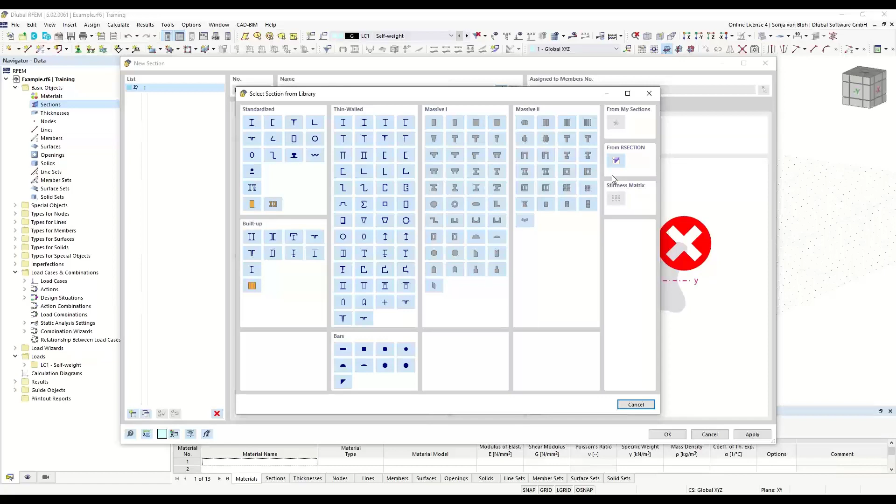Then I open the section library, and here we have a button for importing cross-sections made with RSECTION. So I click on this button, choose my cross-section that I've created, and click Open.

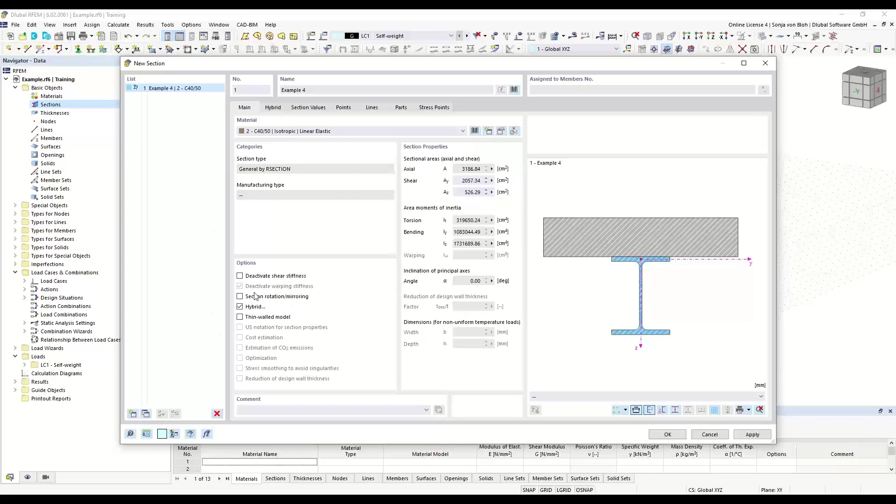Now this cross-section will be imported, and you see that this checkbox Hybrid is activated. In the tab Hybrid, you see the material assignment. You can see for parts number 2, the material S235 is assigned. Then I click here on OK.

It's also possible to change it here if you want to, and it's also possible to choose a different material. You can create it also in this dialog, maybe here an S355.

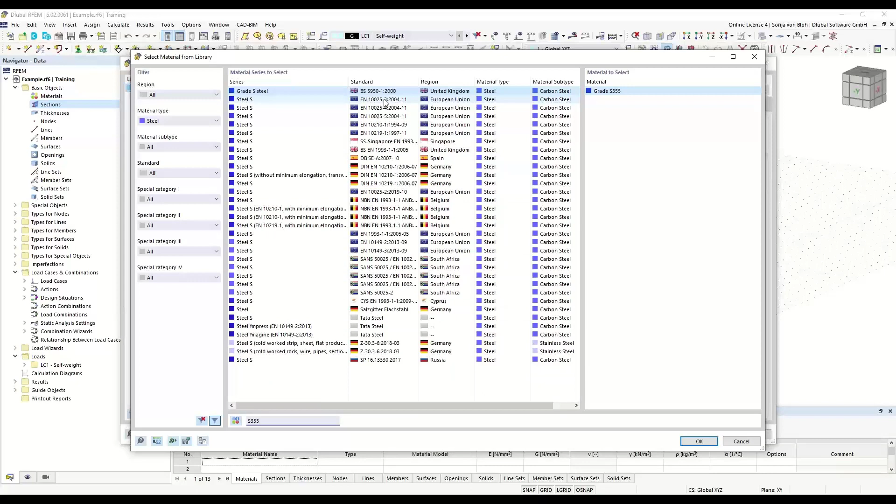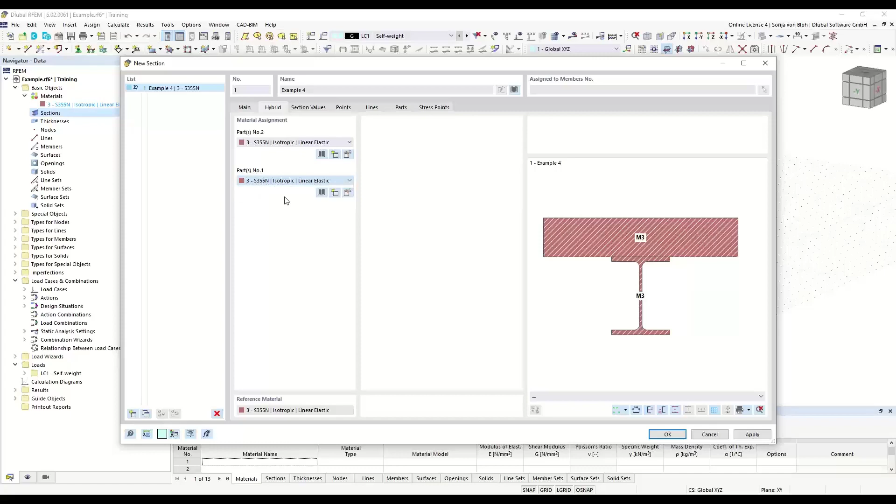And here, maybe it's better to use this material, and here a different material. Sorry, I have made a mistake. I choose here the concrete material.

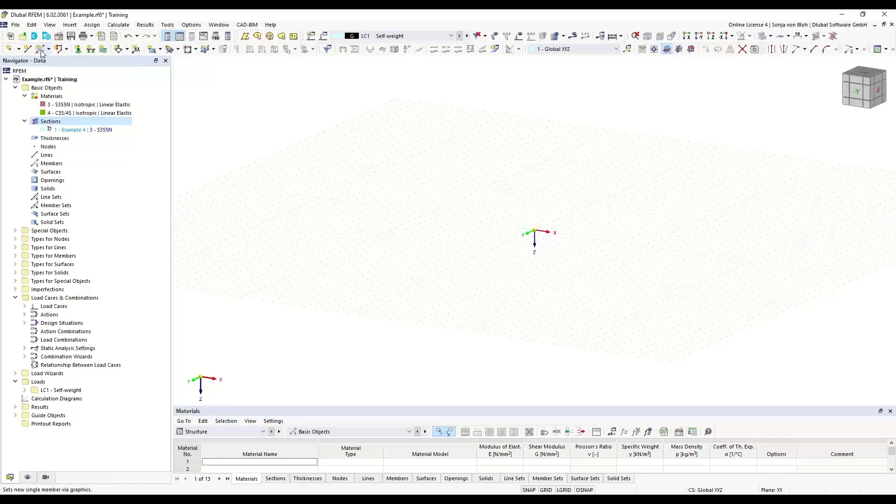So you see, you can change it by your needs, and it's now possible to use this cross-section in a member. For this, I create a new member. Here I can choose the section. And now I've created that member with this cross-section.

With this example, I have come to the end of the training. It was taught how you can create general cross-sections with graphic functions, how you can add cross-section parts to database sections, and create sections based on DXF import.

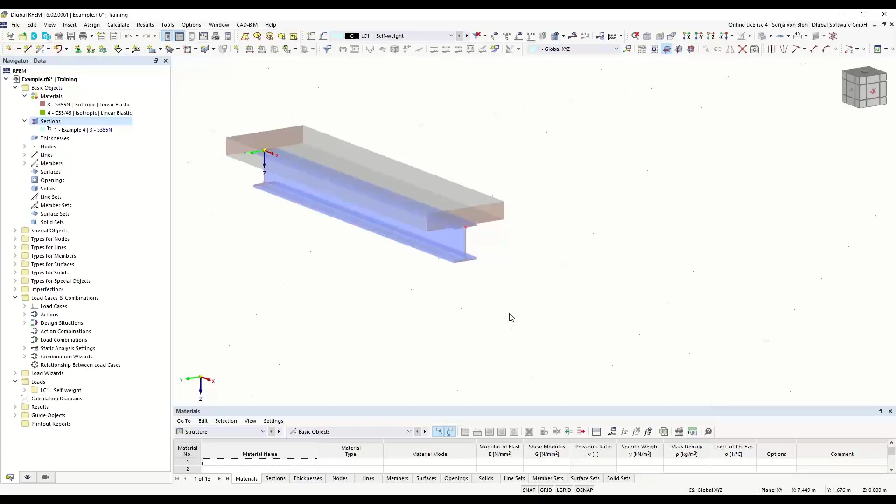Finally, I would like to show you where you can find more information. For this, I open our webpage at dlubal.com, and on the tab Education, you can choose maybe RFEM 6 for students.

Then you can open the knowledge base, or it's also possible via support and learning to open frequently asked questions. I hope that the training for using our section has helped you, and thank you for your attention.